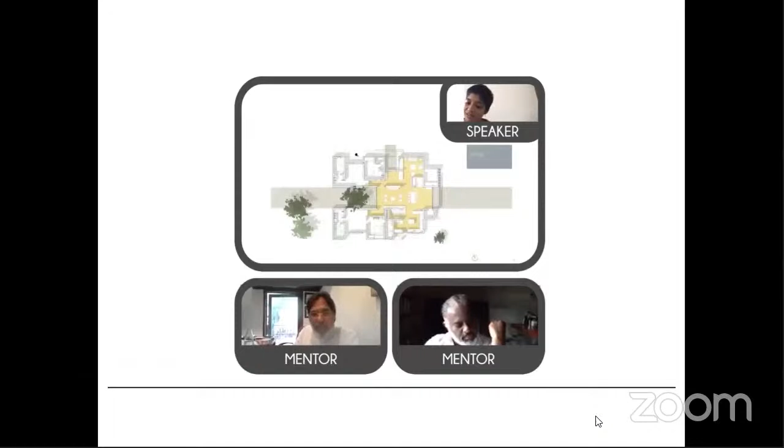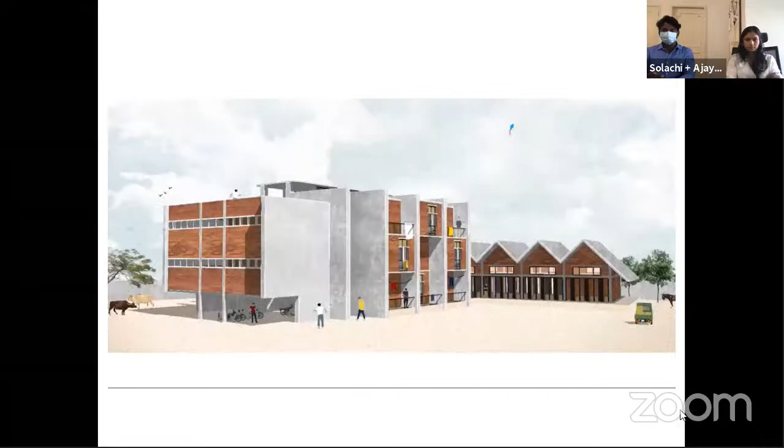Design United was created in March 2020 during a period of intense lockdown and quarantine measures within the region. The aim behind Design United was to create an optimistic space for regional dialogue, connections, collaborations, and opportunities for young regional designers and design practices—a much needed network of support and peer mentorship during these uncertain times. Talented young designers and design studios working on design innovation relevant to our South Asian region have been invited to be part of the platform. We also encourage design students from the region to share their work, be involved in the dialogue, and be an active part of Design United.

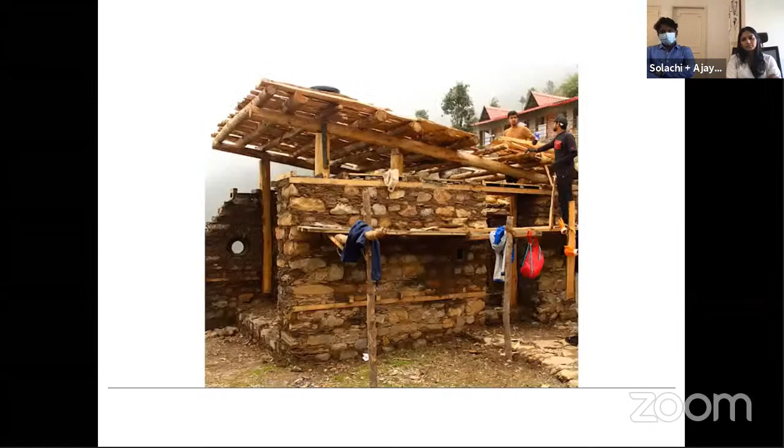Design United, most of all, believes in creating a community of designers and design knowledge that is largely contextual, with a focus on contributing to the environment and our community. Design United believes greatly in a spirit of collaboration and idea exchange.

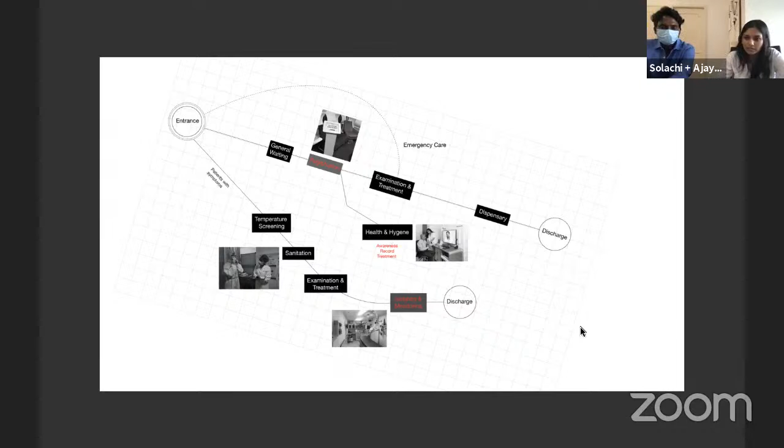So when they told us that they needed it to be modular, we first explored using a shipping container. The advantages of using a shipping container were that it was durable, and also it could be completely built in the factory and simply deployed on site. But when we had a conversation with our fabricator, he indicated that it would actually be more expensive to find a good shipping container and repurpose it, as opposed to building one ourselves suitable to our requirement.

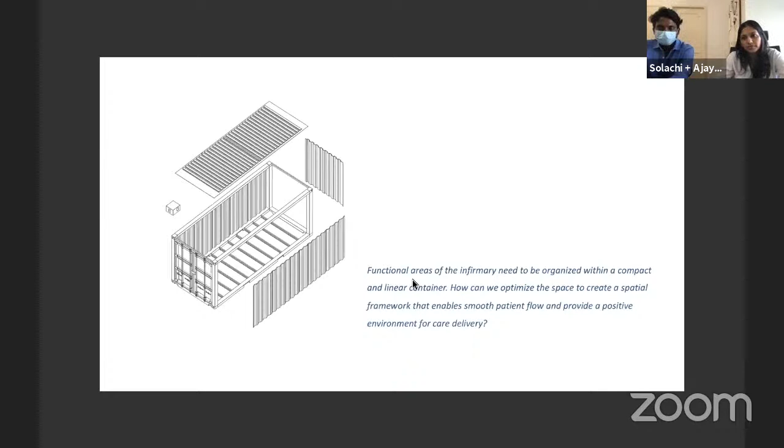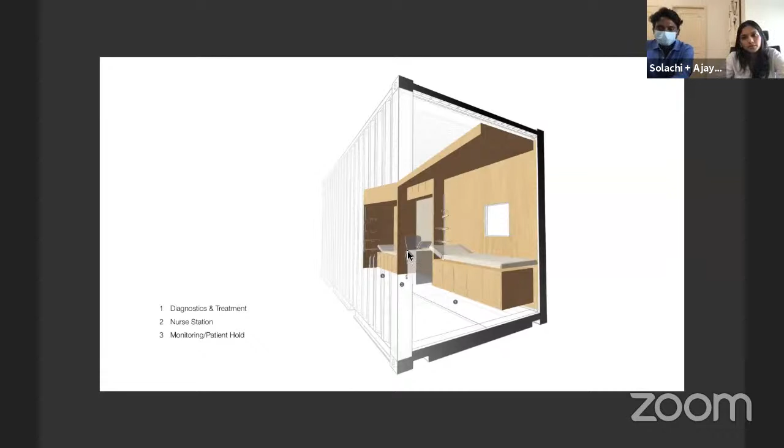So we stayed with the module size because it was easy to transport, and we looked at how we can organize the multiple functions within that proportion of space. We created this deep wall, which manifests in the form of niches, openings, and storage. This was along the longer edge of the container, which contained the primary functions of diagnostics and treatment, a nurse station, and monitoring of the patient. We decided to use plywood because it was a friendly material that one is more familiar with.

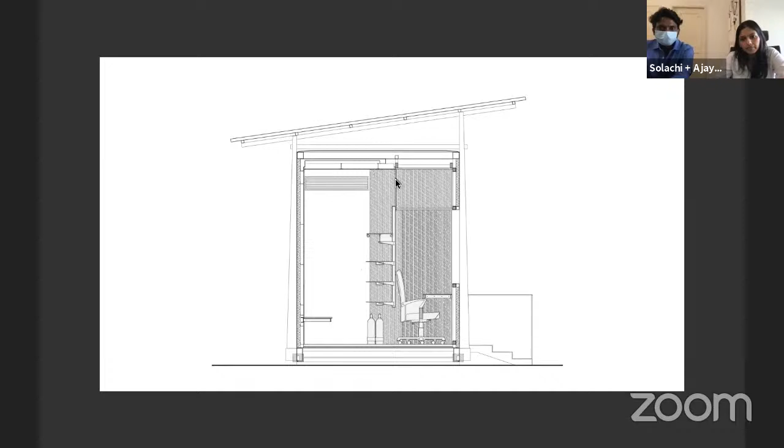Of course, being made of metal, the container had thermal comfort issues. So we provided a secondary roof to reduce direct solar radiation, along with insulation along the walls. The plan basically consists of this wall on one side, and on the other edge of the long side we have the waiting area and registration, so the central area is free for circulation. Other elements like the ramp and staircase had to be installed on site.

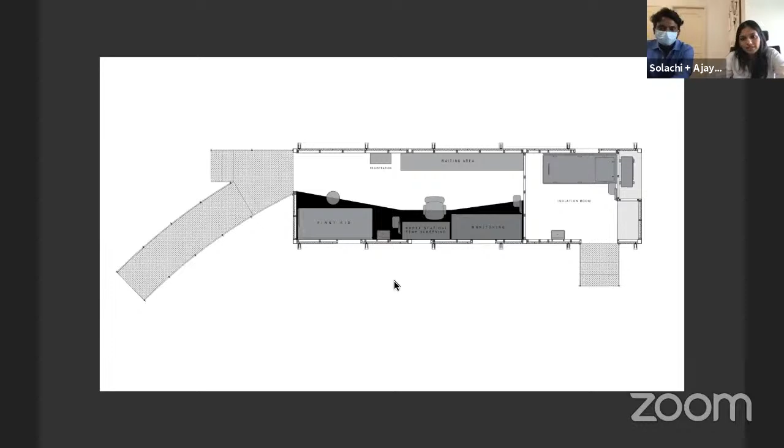Since we were not using a shipping container as-is, this opened up the possibility of rethinking the material expression, the external expression. So instead of using a trapezoidal sheet, we chose to use a flat galvanized sheet, and used the structure of the secondary roof as part of the expression of the container. So the container itself would be completely fabricated off site with the interior, and the ramp would then be assembled on site.

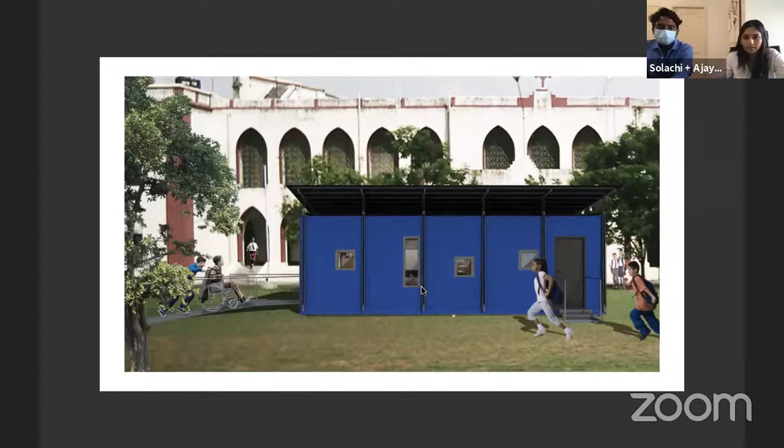That brings us to the second project, which is a vacation home in Coonoor.

When we went to the site, it's a valley view, and you can see Mettupalayam in one corner. We knew that when we saw the site, we had to do very little with the building itself, so our idea was that we wanted the building to be harmonious with the context.

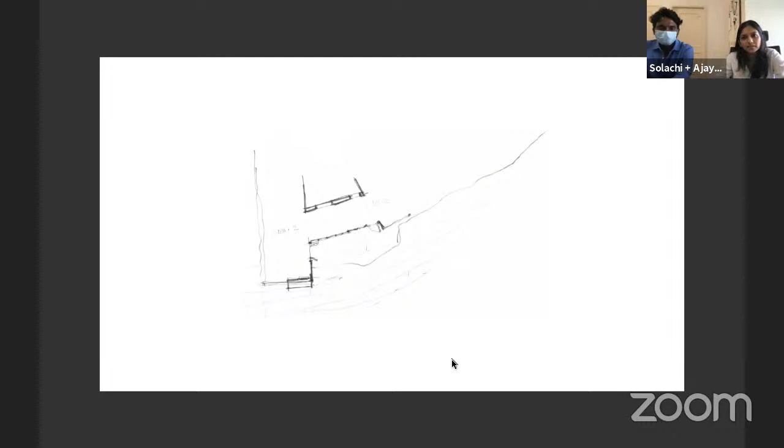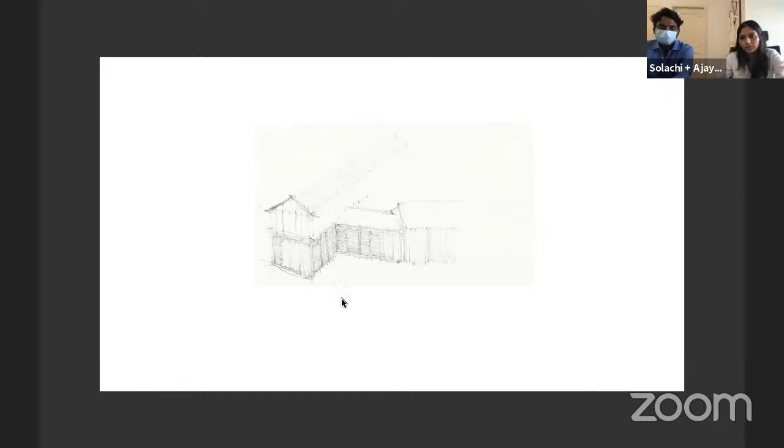It consisted of two blocks, and the manner in which the two blocks were joined was inspired by the shape of the contour. So the building gently turns at angles, facing different parts of the view. The facade of the building is open with windows to the view opposite.

As a result of this geometry, the central space becomes the collective or common areas - living, dining, the fireplace - and the bedrooms are at the ends of the circulation, on the ground floor and first floor. This collective space has a very fluid, organic character, so you don't really feel like you're moving from one space to another, but there's still some separation.

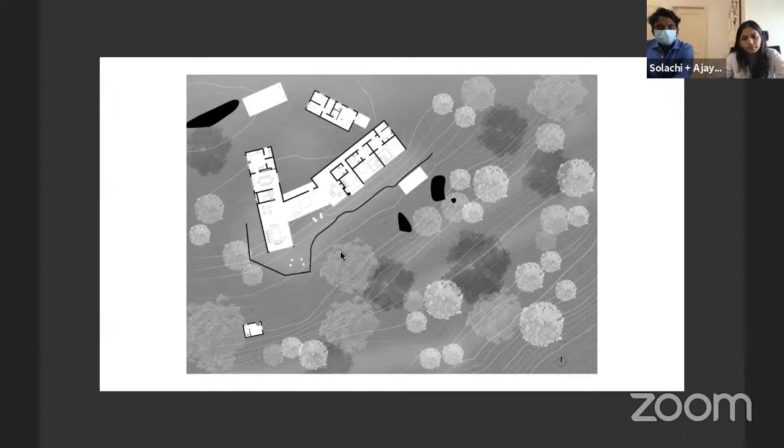We used stone for the flooring, which had a natural finish. The reason for this was we wanted to create a soft edge between the garden outside and the spaces inside, and really make that transition very easy on the person using the space.

Some of the detailing, we used steel at the client's request, because it was going to be easier to maintain, since wood tends to expand over time.

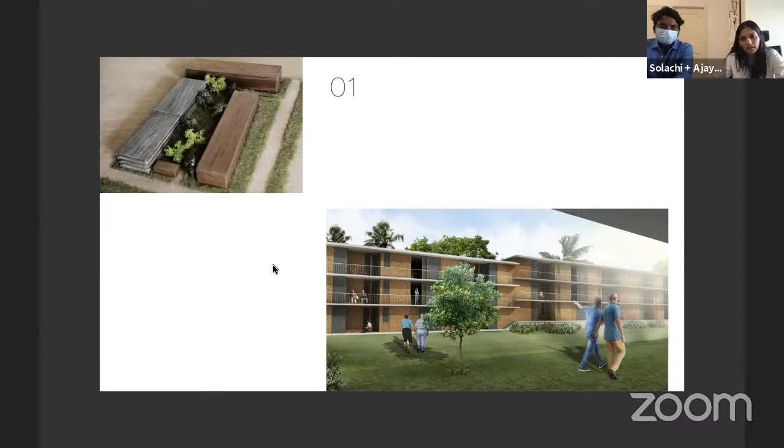So then we modified this a little bit, and we tried to bend the blocks so that they become self-shading in a way. And we wanted to...

Since the blocks now became larger, the passage in the middle became just a green corridor. So we wanted to provide more space for communal activity for people to informally engage. We created a large veranda in front of the apartments on every floor, a space where people could informally gather.

This again was an issue, because while we thought it was important for them to have this space, the clients felt it would be difficult to sell since their personal space became smaller.

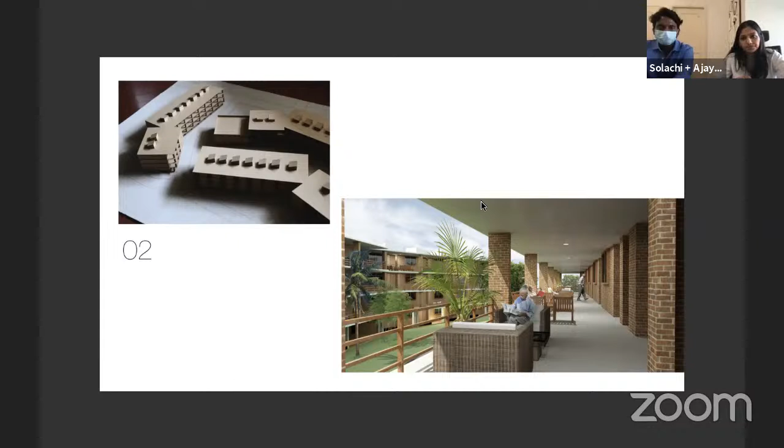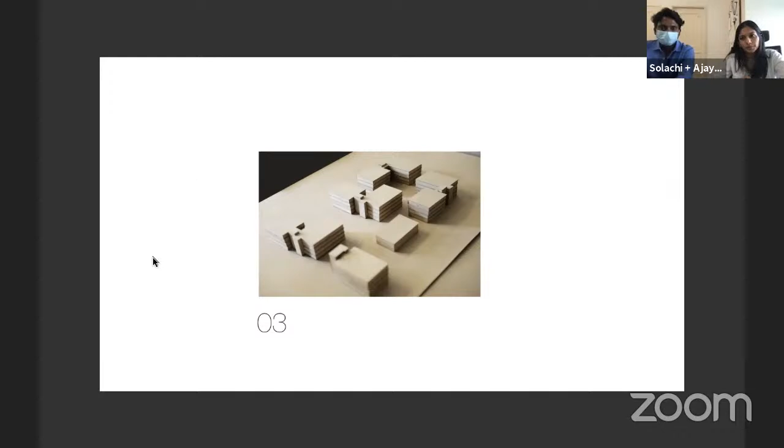So then finally we said, okay, we've tried everything with three blocks, maybe we need to reconsider that. We decided to try a cluster option with a larger number of blocks clustered around smaller courtyards. This led us to the final scheme, where we had 5 blocks to be built in 2 phases, more or less similar, with smaller garden spaces in between them.

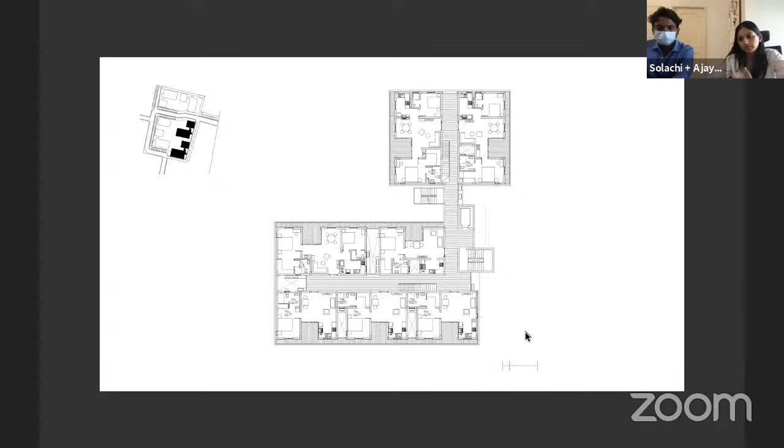The unit itself had 1 and 2 bedroom units, all organized around a covered balcony space. There was a large common continuous balcony which connected all the rooms. We thought the housing did not require kitchens and could be more open, but we were wrong. It seemed people desired an apartment with a kitchen.

In this scheme, we struggled quite a bit with the architectural expression, because it was a medium rise building, neither low rise nor high rise. So we tried to create a variation in the expression of the balconies. On the upper floors, continuous balconies open to sky, and on the lower floors, wherever possible, we created large planters.

The spaces in the common, the community center.

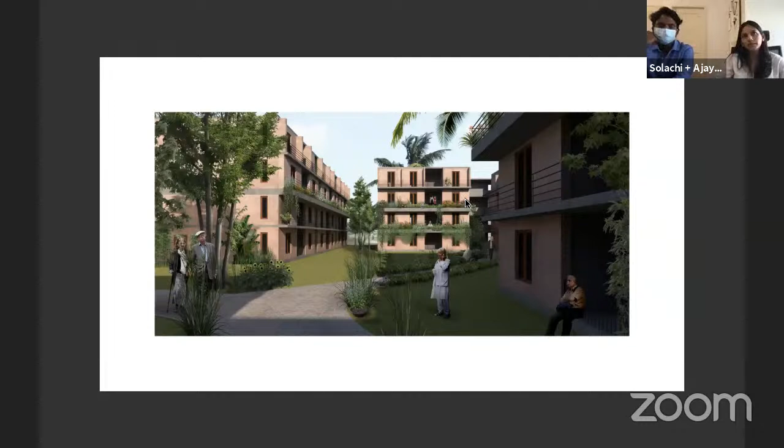Learning from this, I came back after my master's in housing and urbanism, and I've been exposed to many different typologies of housing, many interesting ones. But I think the big learning was that it's very closely connected to the nature in which it is provided - who provides them, whether it's government or private, whether it's rented, for lease, or for ownership.

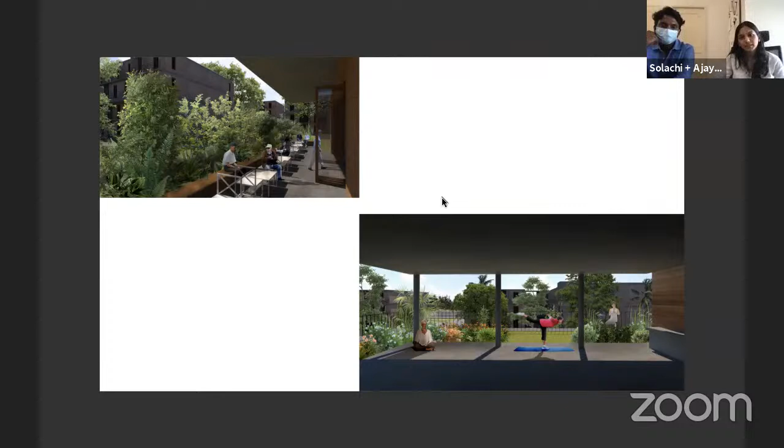So with that, we'll go to the last project. Samudra. Scroll up when you need to.

Samudra is another residential project in Chennai ECR, in closer proximity to the coastline. The area is about an acre of land, and there was an existing building. The client's requirement was to retain the existing trees and allow more light and ventilation inside.

So we ensured the plan was made with rooms in juxtaposition, with not much corridor space, and it's open towards the garden around. It has multiple entries, so you can step down to the garden from most places like the living room, master bedroom, dining, as well as from the library.

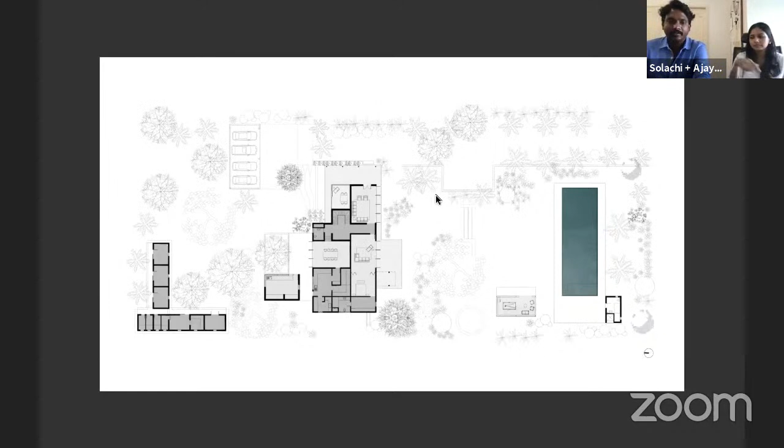So all the guest bedrooms are on the first floor, which will have regular domestic activities.

Brick cladding is a major material which we have used here. The brick we used is customized for our requirement - used here for cladding, and the other block we used for load bearing structure as well.

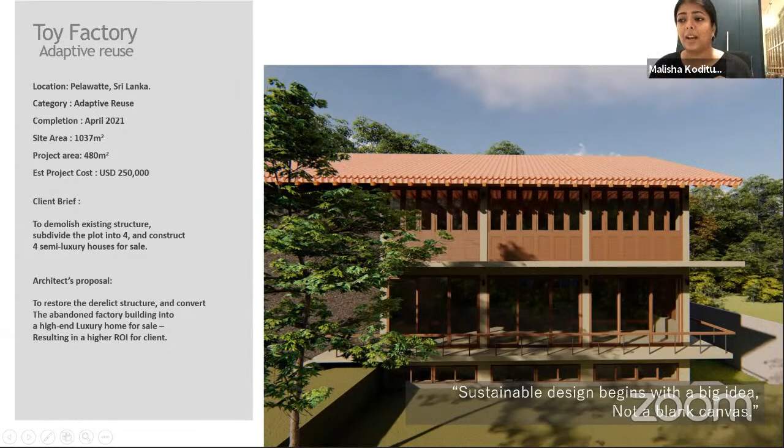So the first one, this is the first time anyone's seeing this because it's still under construction, and it's actually going to be completed sometime next month. This is a 3D rendering of what it would end up looking like. The client came to me with a plot of land, 40 perches or just over 1,000 square meters. He had invested in it because there was a useless building on it, for land value, and it was going to be divided into four. He came to me with the option of putting up four semi-luxury houses for sale. So it was entirely an investment project, from his point of view.

And I gave him a counter proposal, and I said, what if we restore this building? Because I really didn't want to bring it down. It was a 5,000 square foot building. I didn't want it ending up in a marsh somewhere. So I suggested why don't we try and redo this and market it to a higher end, like a luxury home. That actually resulted in a higher ROI for the client, because his investment was smaller and his return was higher ultimately, once we get to that. So it is a slightly bigger budget project, about $250,000 US.

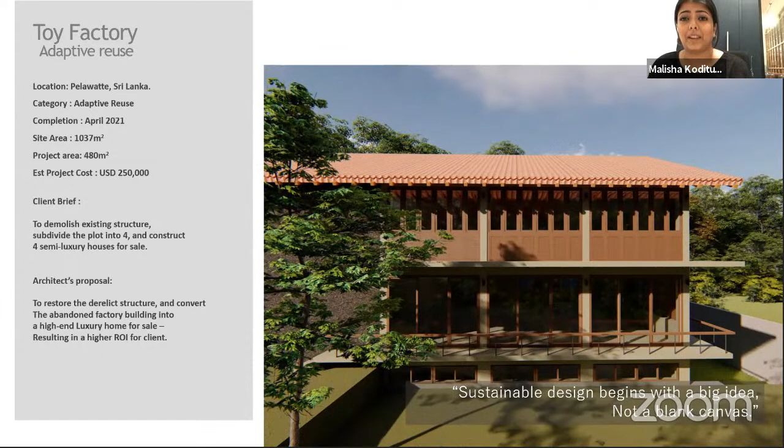I'll just run you through what we did. Next, please.

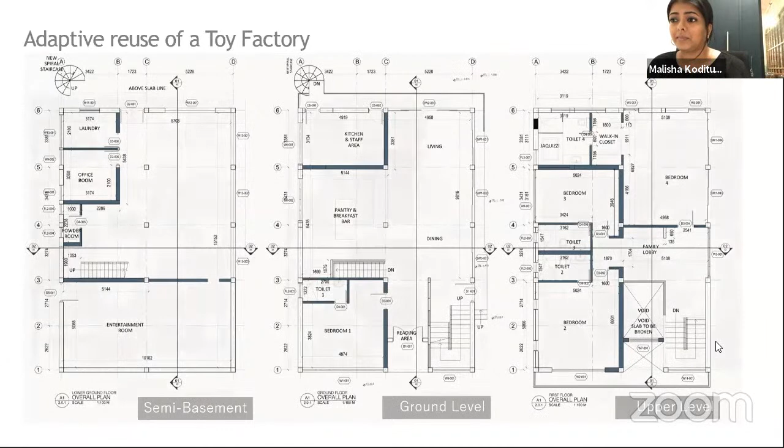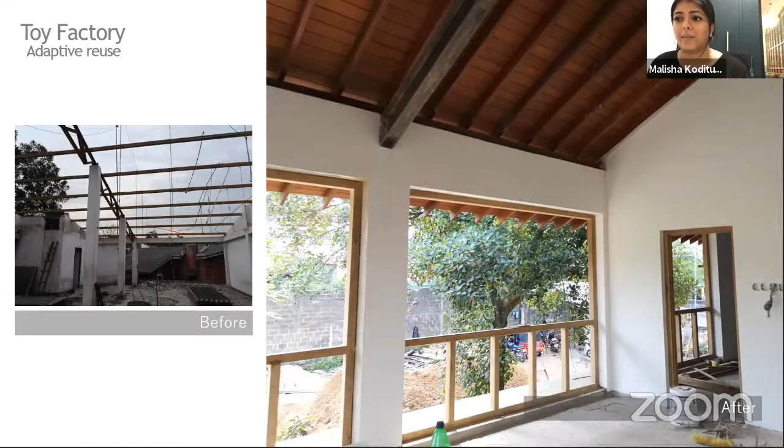So that's currently what it looks like. I think the left photo is when we had taken the roof off. The roof was the only element we had to completely replace because it wasn't suitable for a home, but we did use the steel that was on the roof. We did reuse the steel that was on the roof, I think you see it here on the photo on the left. All the steel purlins were restored, finished, and reused for the garage, and we did an outdoor parking space that was reused for that. So the roof was done afresh, but it looks much more like a home than the picture on the left, which again is the same space. Next.

So that's the same view that you're looking at. You see the same jack tree in the view. The left would be the building when we had just started working on it, and the view on the right is as it is currently.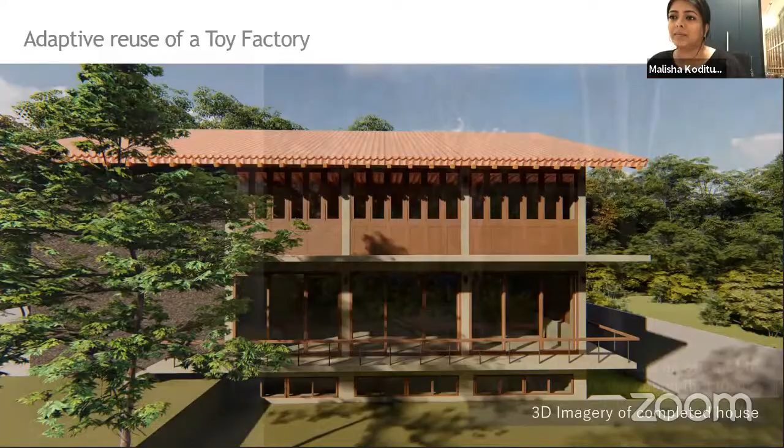The next one I'd like to present is the Box House, a container conversion. It's a 5-bedroom, 5-bathroom villa, but only 230 square meters, about 2,500 square feet in total. The villa itself is only 2,080 square feet.

I think the biggest thing to learn from this was that by being restricted by the containers and the volumes themselves, we actually managed to fit a lot more into a little space. On the left is how the containers are configured. The space in the middle was fabricated, between the containers, and we roofed it separately to give it a different volume from the rest. The structure is almost entirely repurposed steel, about 90% reused and only about 10% new materials, which was used for the roof of that middle section.

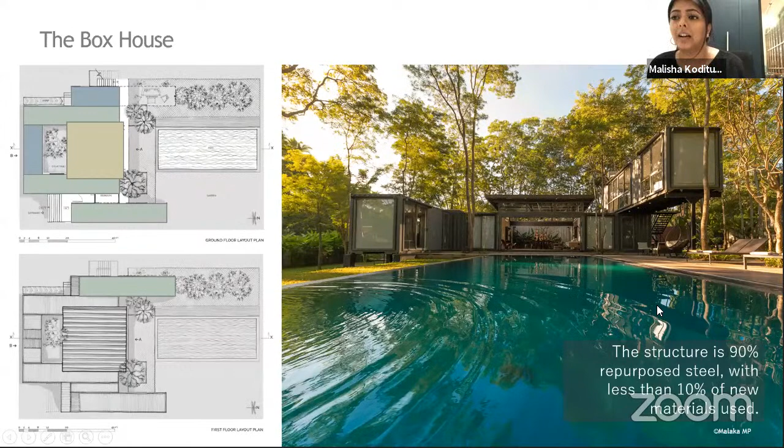So that's what the inside of a shipping container looks like. It's very basic, and I think Urban Workshop would appreciate the amount of detailing you have to do—it's different to what we usually do. It's a lot of detailing and learning on the go.

Unfortunately, our project was so complex, the connections were so complex that we couldn't do a lot of fabrication at the factory, and we had to do a lot of it on site. So at this stage, we moved it to the site.

As you can see, sometimes it doesn't always go to plan. Our container broke—they dropped one of the containers while trying to place it. It was a bit of a process because we had a lot of trees on site, and I was determined not to let any of them go. Unfortunately, I had to cut one tree, but I managed to save everything else. So this was the price we had to pay—we had to maneuver between trees and ended up breaking a crane and dropping a container.

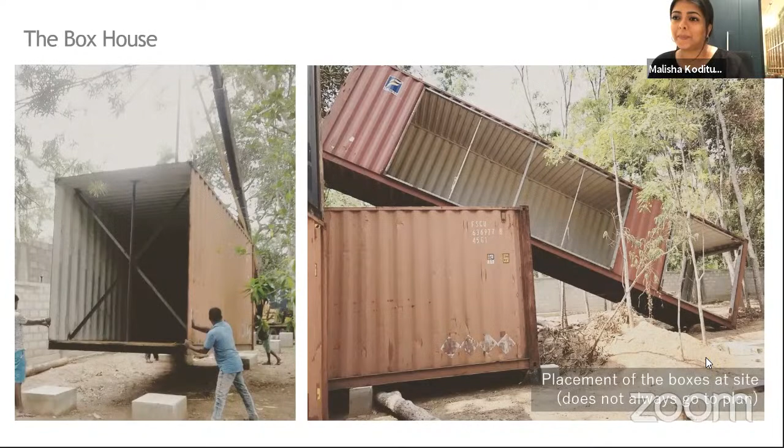So that was once we had got everything set up in place.

So there you see a little more of the final form, and we did things like open-to-sky showers. That's how we did the fabrication before everything else was fitted in.

As you can see, there's a lot of panel work and board work on the inside—a lot of fabrication.

The tree stump you see in the picture on the right was the tree that we unfortunately had to lose.

As you can see, the entire structure is above ground, and the ground under the site had a natural slope which we didn't disturb, so rainwater flows right under the house without disrupting anything. The whole house is essentially on stilts.

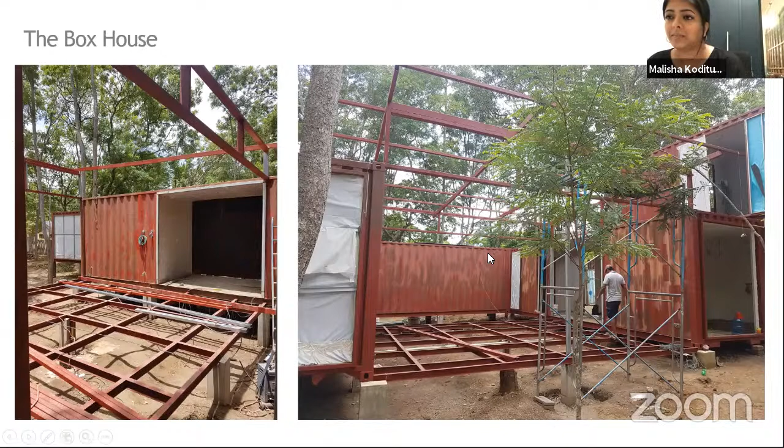So a few pictures of the completed project. We were able to reuse 17.5 tons of steel from these containers, and we can recycle it again at the end of its lifespan, which I think is a great option.

Next. So you see the front elevation, that is the elevation that faces the garden. It's a 1 acre site, so there are beautiful trees that were already present on site, probably 100 years old at least. And the entire front elevation is glass to face the view.

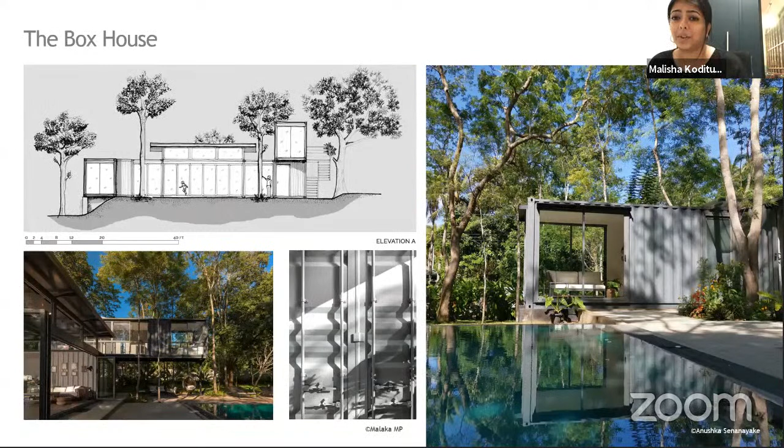So that's a few insights into the inside of the container. It really doesn't feel like a small metal box at all. I think when you're confined to using smaller spaces or modular spaces, you make the maximum of it. That's the elevated room upstairs and the open to sky showers.